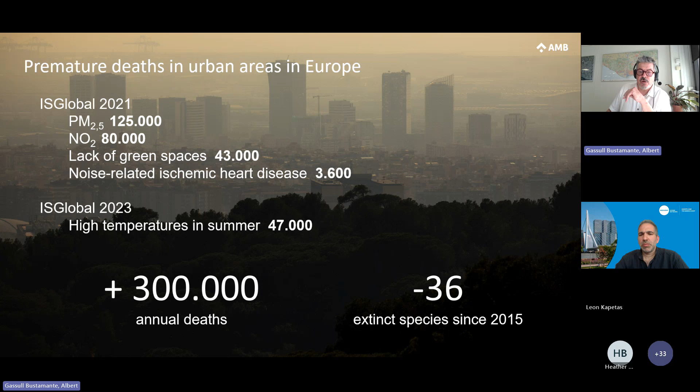Well, so what's Europe doing to address all this? Heather, since you've been in the Netherlands, you already know that we have the European Green Deal, which aims to create a cleaner, healthier, and climate-neutral Europe by transforming the way we produce and consume.

After that, we had the biodiversity strategy in 2030 that aims to put Europe's biodiversity on the path to recovery by 2030 for the benefit of people, climate, and the planet. And in the end, what we're talking about is this nature restoration law, that aims to put measures in place to restore at least 20% of the EU's lands and sea areas by 2030, and all ecosystems in need of restoration by 2050.

As you already know, members have to do their homework, and by September 26 we have to have our drafts made, and they have to be approved, with a final version in September 27, and then from June 32 we'll restudy all this.

And in this we have Article 8 that's talking about urban greenery: no net loss of urban green areas and urban tree canopy by December 2030, and then from 2031 onwards, an increasing trend is necessary to satisfy levels. So that's the thing, and that's what we are working on.

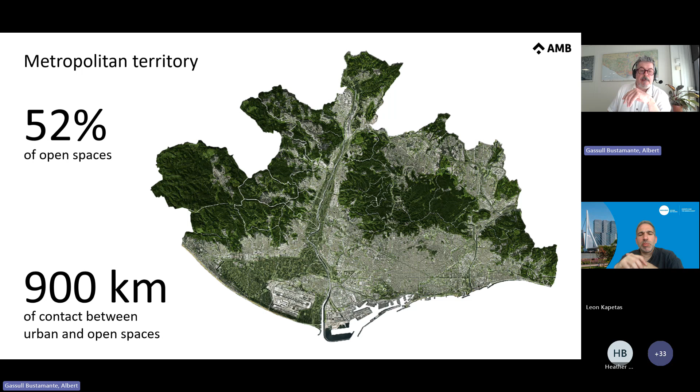But the good news is that we could increase this 52% to nearly 71% if we take advantage of the opportunities offered by the urban fabric and the building rooftops.

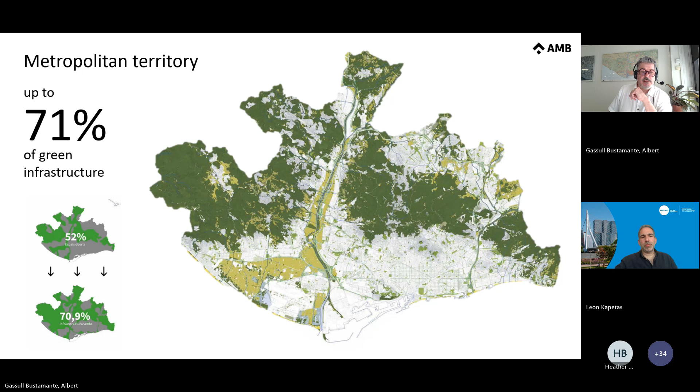Well, what's the AMB, the Metropolitan Area of Barcelona, doing? It's doing a master plan that is the instrument that will organize the metropolitan territory in an integrated manner in the coming decades. As you can see, it's based on 5 principles. The first one is preserve ecological functions and ecosystem services. This means organizing the territory through green infrastructure and things like that.

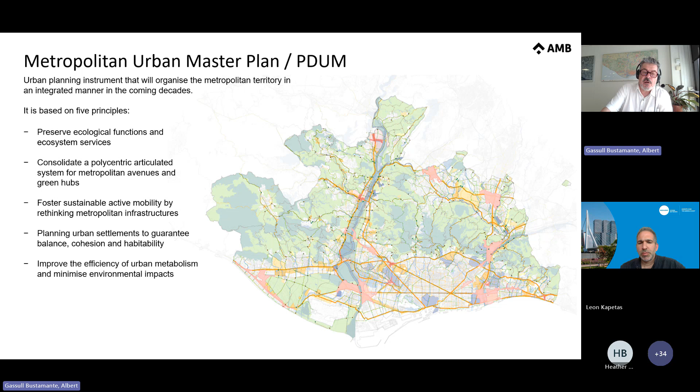Apart from that, since January we're working on the Metropolitan Strategy on Green Infrastructure, Connectivity and Ecological Restoration to give an answer to this law we're talking about. But in the meantime, what have we done till now? In 2019, we began to work on a sustainability protocol that we put into practice in 2020.

The sustainability protocol for the AMB and IMPSOL - AMB is us, and IMPSOL is the metropolitan company that makes public housing. This protocol was created out of a sense of professional and institutional responsibility in the face of the climate crisis, and it has become the framework that guides our response to it.

It is a guide that promotes green public procurement and provides technical teams with a practical tool for aligning projects with the sustainable development goals of the 2030 agenda. It is a cross-cutting, multidisciplinary tool that supports both climate change mitigation and adaptation, and helps guide decisions through all phases of the project, from the earliest planning stage to implementation.

This protocol is organized in 6 fields that develop 19 criteria. Unlike other internationally recognized environmental certification systems such as LEED, BREEAM, or Verde, this protocol is not a scoring system. Instead, it defines 19 mandatory criteria that are grouped in these 6 fields.

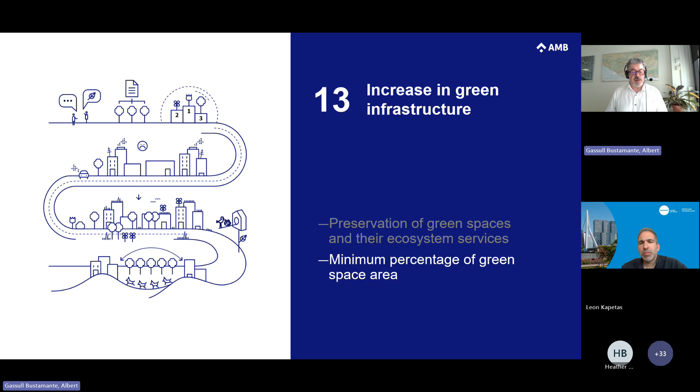And I will show you what this means. I mean, we have this project of the street, and when we're talking about layers, we're talking about not only the canopy, but also the green infrastructure on the floor, on the ground, like bushes and things like that. And we count everything there.

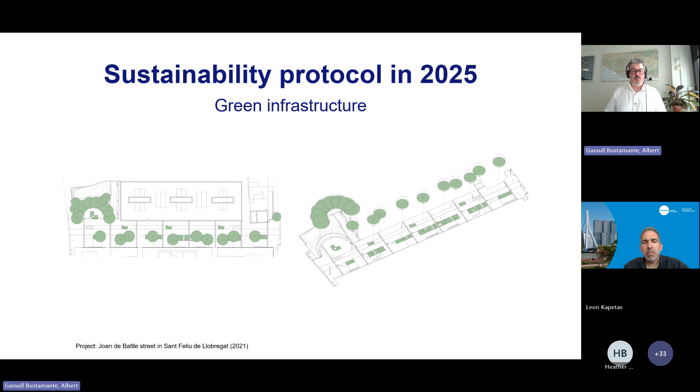And we are requiring a minimum of all this depending on the type of project we're working on. So on the left hand of this graphic you have the cover, the zenithal green cover, the canopy that it's obliged to have in the space where we're working, and on the right hand you have the sum of all this amount of green spaces, different layers, how it has to be.

So in parks, for instance, you have to have at least 75% of the surface covered by a canopy, but in the end you have to have 110% of the surface covered by green. This means it's more than 100 because you are summing the green infrastructure you have on the ground with the green infrastructure you have on the trees, and the same for squares, streets, and buildings.

And this is obliged, so you have to begin thinking on the project with this, because you cannot count the trees or the surfaces you are using after you finish, because probably you won't be able to accomplish with the protocol. That's something very important that we have to use since the very beginning of the projects.

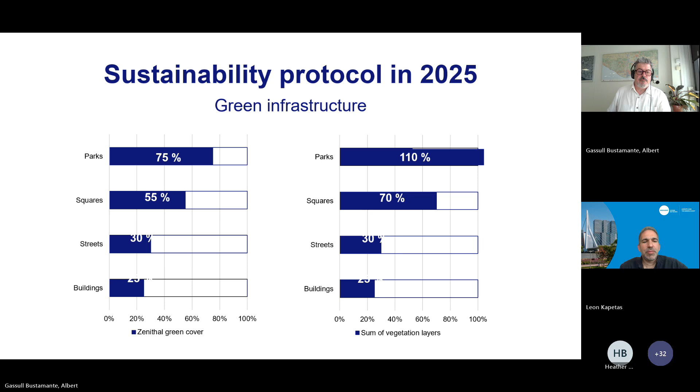Second thing is contribution to biodiversity. So the first thing we have to do is identify whether there are any species of special interest or degree of threat in the area. If that's the thing, we have to take the appropriate actions to maintain that and to preserve the biodiversity existing there. But not only that, we have to be able to increase the biodiversity of the place.

And for that, we have a list of actions that can be shown, of many different kinds, like encourage tree species diversity, which is fundamental for biodiversity, or encourage shrub and ground cover species diversity as well. Generate diverse vegetation strata, avoid planting tree species that represent more than 10% of the municipality tree inventory, plant flowering trees in tree pits and sow grasses, prioritizing plant species that bear fruit during the bird migration season, or that are attractive to pollinating insects, etc.

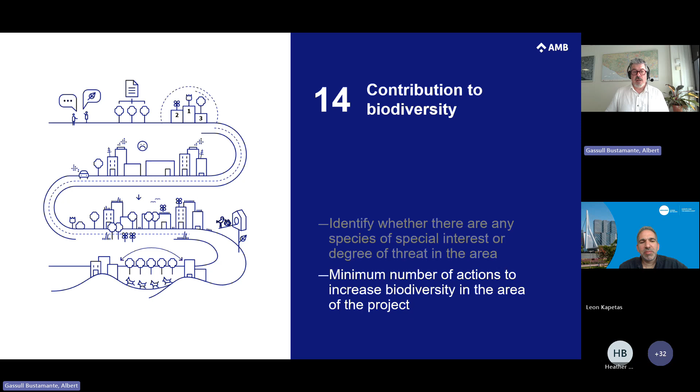This goes up to 13 actions, and depending on the kind of project we are doing, we have to choose from 3 to 7 of these actions to improve biodiversity of the site.

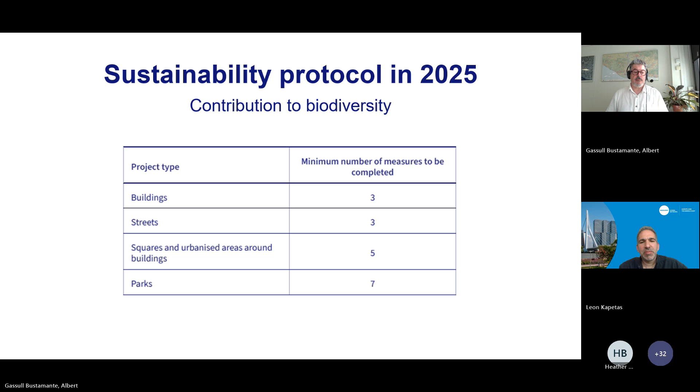Water is the next thing we are worried about: water management, rainwater management in public space. We have to study the water flows, know the capacity for rainwater management, and understand the water quality we're going to bring back to the soil.

We've made these impermeable, waterproof cities where water doesn't go to the ground, but to the sewage system, and from the sewage system to the sea. So we are not bringing water down to aquifers, we are taking water out from them. We're emptying them but not refilling them, so we're having problems because they can get salinized or contaminated due to lack of water.

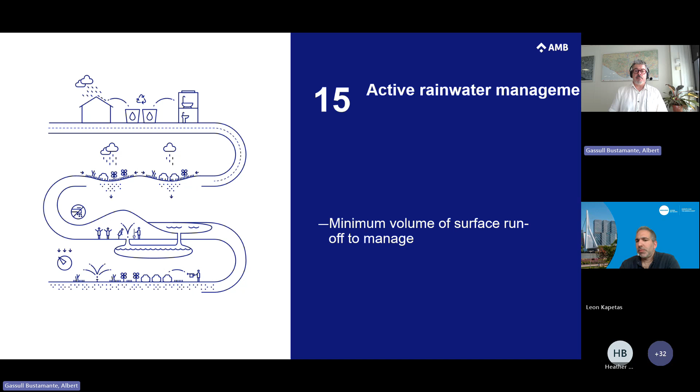So we have to try to bring as much water as possible back to our aquifer system. For that, there is a minimum volume of surface runoff to manage in every project, which also helps reduce the heat island effect. This is the amount of water, in millimeters, that we have to bring back to the subsoil in all projects: streets, squares and parks, 15 millimeters, and urbanization areas, 10 millimeters.

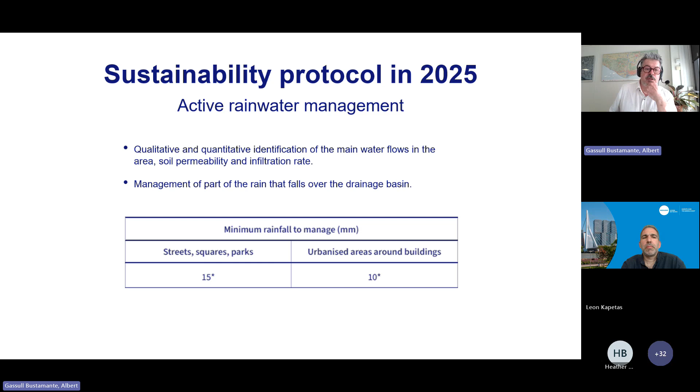This represents 80% of the rainfall. So we have to get this 80%, meaning these 15 or 10 millimeters.

The other problem we have is the heat island effect in urban areas. We've built these impermeable cities, but also with very high thermal inertia. Surfaces absorb this heat and then release it back to the air when the air temperature is decreasing, and this creates a high heat island effect that we have to deal with in some way.

So for public space, to help reduce the heat island effect in the city, the percent of paved surface that retains the most heat - impermeable pavement exposed to sun in summer - is limited with respect to the total area of action. We limit how many square meters of impermeable surfaces able to retain heat are exposed to the sun.

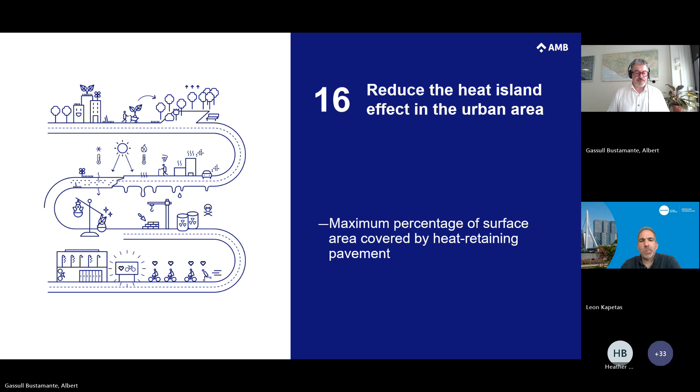And in buildings, we limit the percentage of envelope surface area that retains heat as well. Buildings are mainly the biggest problem in this sense, because we can treat pavements and so on, but in the end, buildings are there - it would take very long to change them. So at this moment they are retaining lots of heat that goes back out, because they are made of stones or things that have very big thermal inertia.

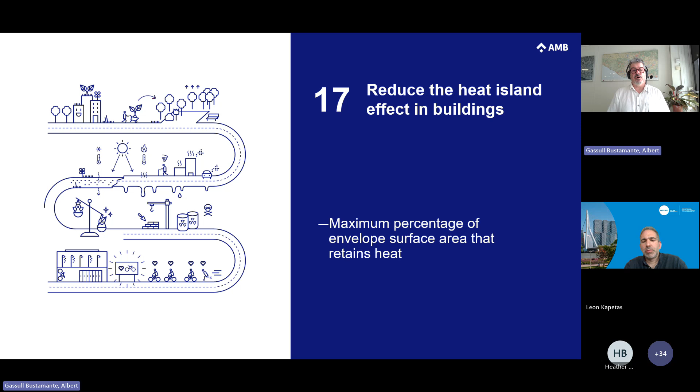So we have to work as well on buildings, not only on the streets, on public space. This is the reduction of the surfaces that have to be shown, the maximum surfaces allowed.

I don't know if you see it properly, because something seems to be moving here, do you see? I think you don't see the numbers properly here. Yeah, for the last one, for streets, we don't see it. Okay, I will tell you anyway. There is the scale though, we can see the scale below. Yeah, well, you see the scale.

So in parks we can only have 20% of surfaces that retain heat exposed to sun. In squares it's 40%, and in streets it's 65%. In facades and rooftops it's 40%. With that we try to diminish the surface retaining heat, so that less heat is brought back to the air.

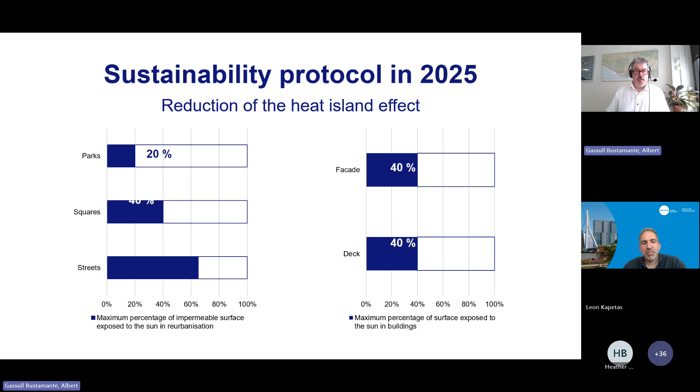I'm not going to talk about mobility, because these are the tools we have to fight against these climate change effects - this is the part about mitigation of climate change. Through green infrastructure, water management, and trying to reduce this heat island effect, we try to make our environment more comfortable for all of us.

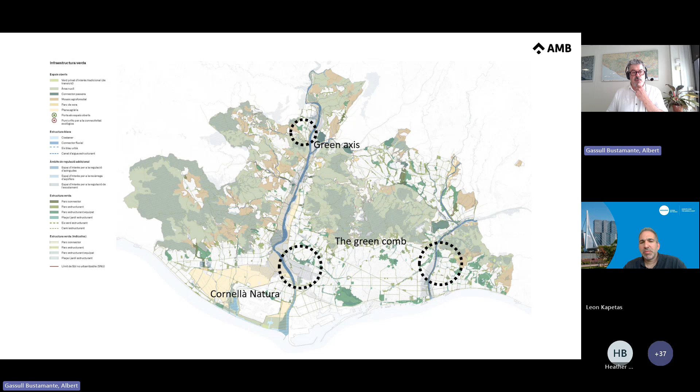Now I'm going to show some projects in which we've put this into practice, to see what this means in reality. This is again our metropolitan area. I'm going to show three urban projects, and then another project of a different kind, in which we've tested everything we've been talking about. The first one is the Cornellà Natura.

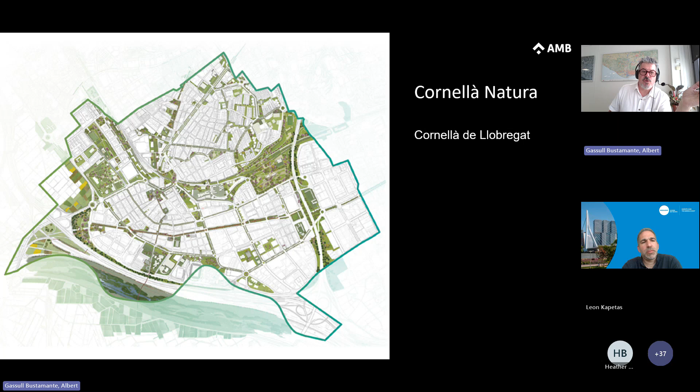Cornellà Natura is an urban strategy to link, through green infrastructure, important points of the city. You have the river down here - this is the river Llobregat - and this shows how from the river we are able to bring green infrastructure through the city around. This is a plan we've been developing through several works. I'll show you some of them. This is how the Alps Avenue was before, one of these parts, and how it is now. I'll show you several pictures of that project.

The second one I want to show you is the Green Comb in Santa Coloma de Gramenet. This is the Besòs River, the other river that crosses our territory. The idea is called a comb because it's like a comb that's going through the streets, trying to bring green infrastructure from the river to the Serralada de Marina, the mountain beside it. This is a project with the same aim as the one you saw before, using the river as the beginning of all this infrastructure going through the streets along the city. I'll show you also some pictures of that.

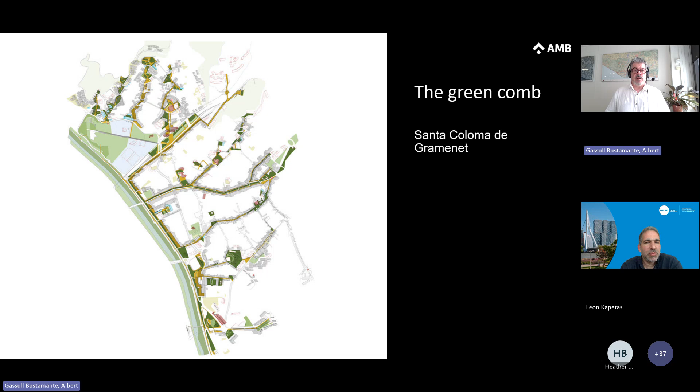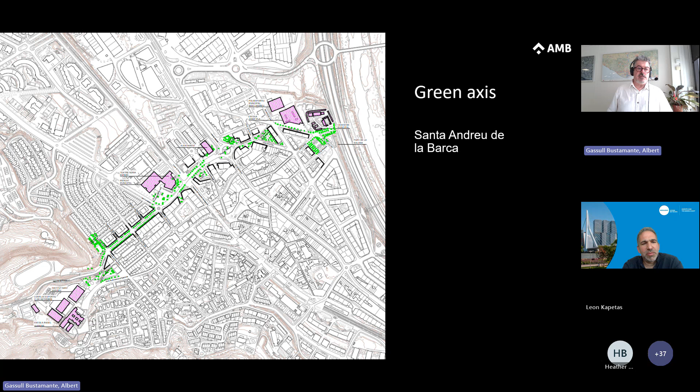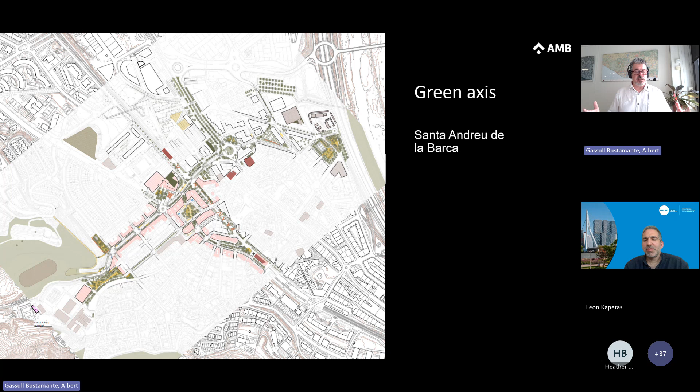The last project we're working on, it's not done yet, but we're working on it. This one is in Sant Andreu de la Barca. It's a project that tries to bring green infrastructure from the river to the mountain and make an ecological corridor through the city. This is the idea, okay? And this is the project as it is now. It's still on our desks, we are beginning it now. So it's one more of these exercises we're doing to bring more green infrastructure and enhance biodiversity in the cities of the metropolitan area.

To finish, I want to show you two slides of a project we're working on called TopSec. This is an innovation project that aims to address urban challenges related to climate change and waste generation, proposing the installation of self-sustainable green roofs that do not require irrigation. Additionally, the project will investigate techniques for water retention and the selection of suitable plants using an innovative substrate made by biochar produced from local organic waste.

That's the thing we haven't been talking about till now: it's waste. It's another problem we have in our cities. Here we are trying to solve three things through this TopSec project. It's a project funded by the European Urban Initiative, and co-funded by the European Union, of course, and it's trying to attack again the heat island effect, to work for better biodiversity, and this using organic waste.

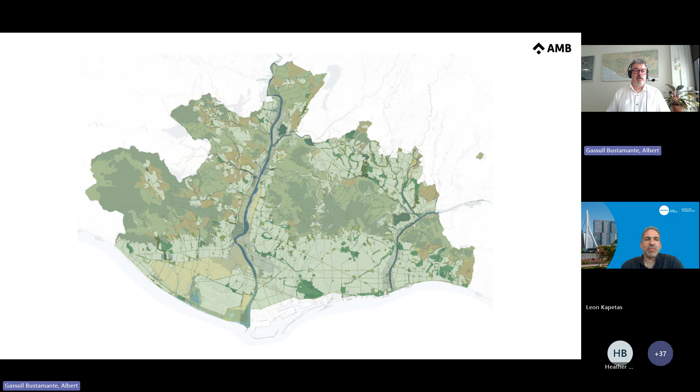Working this way, we will try to bring our metropolitan area to a greener stage. I hope during the following years we will be able to reach this 75% of green infrastructure in our territory that I was talking about at the beginning. Thank you very much, I'm open to questions. I hope it has been interesting enough for you, and anything you need, I'm here.

Thank you, Albert. It was indeed a very interesting presentation, and it's great to hear about your sustainability protocol. Congratulations on the work, and I also hope you get to this 75%, which is an ambitious target you've set. I'll start with some questions of my own, even though I knew your projects already, but hearing you present them, some questions naturally arise.

So from what I understand, you're already thinking of specific ecosystem services you want to deliver. You want to increase biodiversity, the abundance of specific native species, but you're particularly targeting heat mitigation and temperature regulation, and water regulation through infiltration, reducing the amount of water needed for irrigation. So that's quite an interesting combination.

You have the nature restoration regulation, which tells you you have to green, you have to have more trees, but you're contextualizing it to the local challenges in Barcelona. I found that particularly interesting. What I also liked is looking at the picture of the green axis, you see a very urbanized area, a river, a mountain. It's incomprehensible to somebody in this field to think, okay, now we're going to connect this with a green corridor. That's quite ambitious and impressive, even if it's still only on paper.